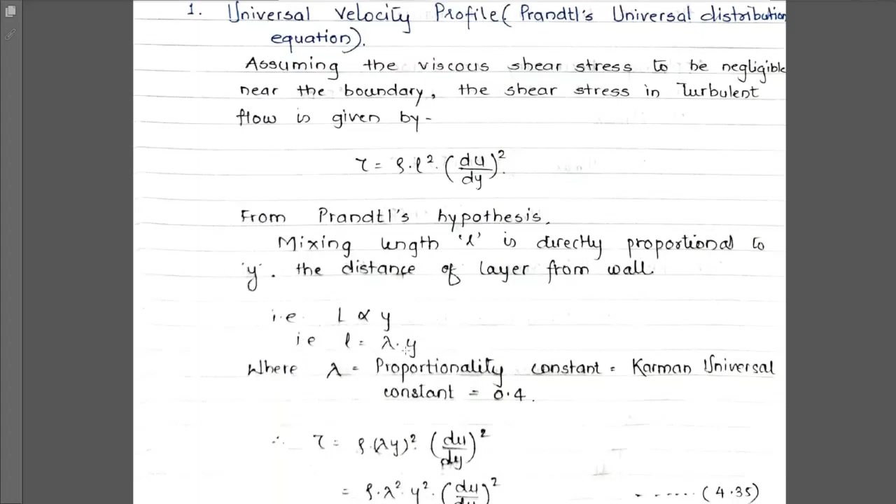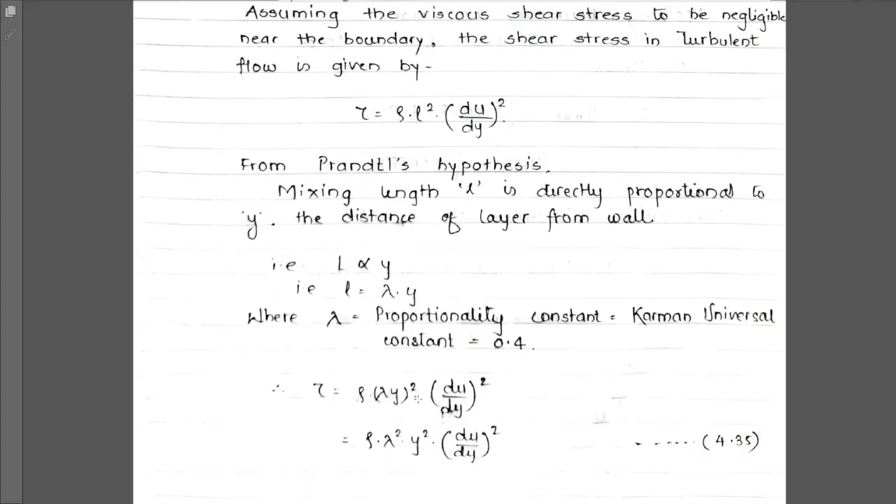If we substitute the value of L, that is lambda into y, into the expression for shear stress, we get tau equals rho into lambda y whole bracket square into du by dy whole bracket square. Rearranging these terms, we can write shear stress equals rho into lambda square y square into du by dy whole bracket square.

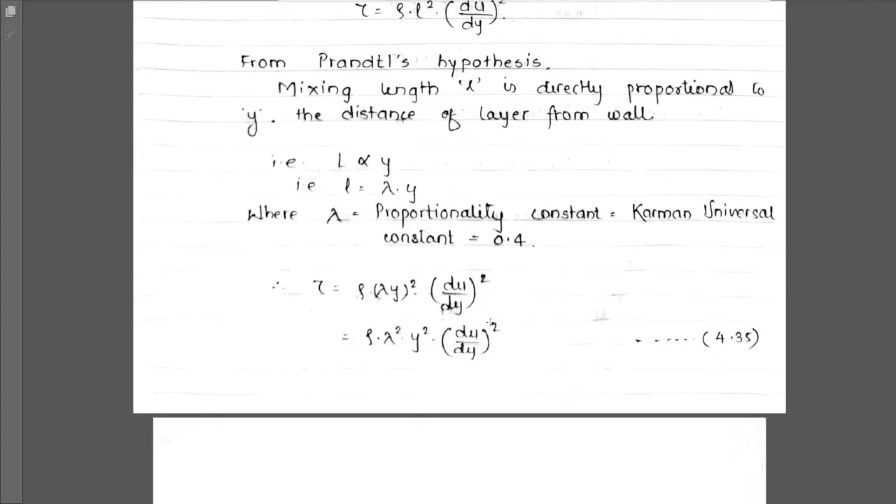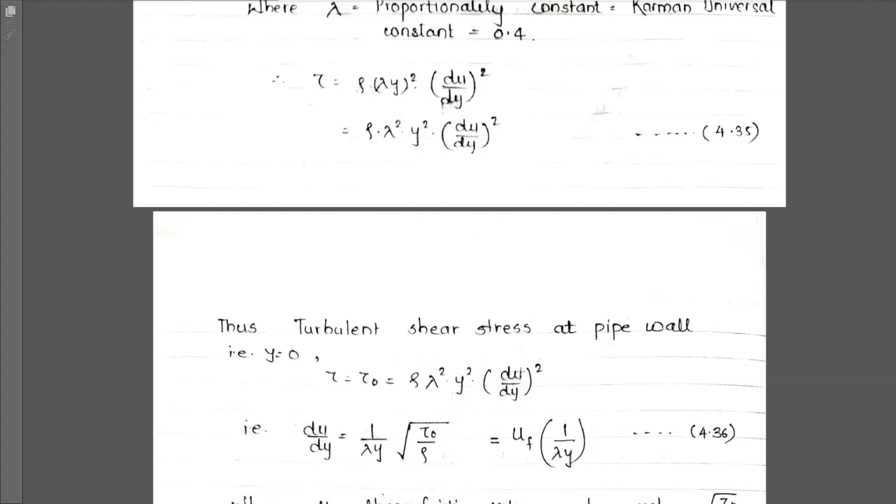If small values of y, very close to the boundary of the pipe, are considered, Prandtl assumed the shear stress tau to be constant, equal to tau zero, the shear stress at the pipe boundary. So tau equals tau zero equals rho into lambda square into y square into du by dy whole bracket square. We can rearrange this to find du by dy.

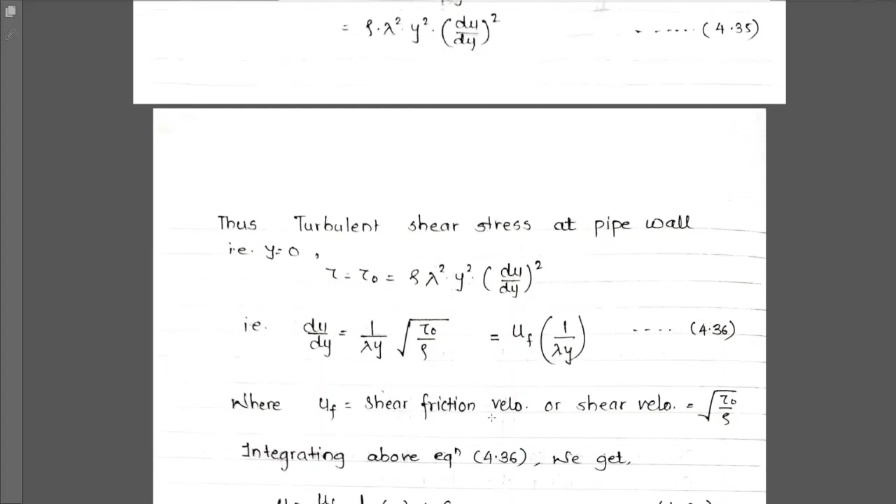We can arrange this expression in terms of du by dy as 1 by lambda y, root of tau zero by rho. We can substitute the value of root of tau zero by rho as u suffix f, where u suffix f is nothing but the shear friction velocity, also called the shear velocity.

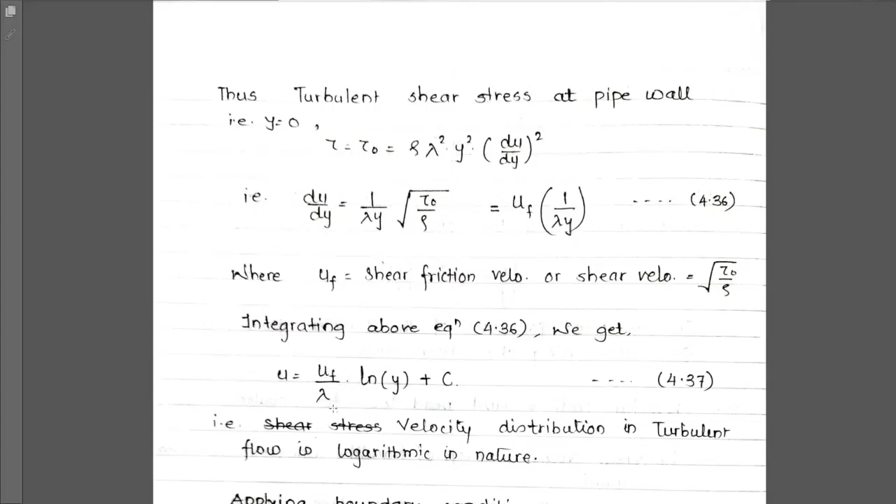Now integrating this equation, we get the velocity expression: u equals u suffix f divided by lambda into ln y, plus c.

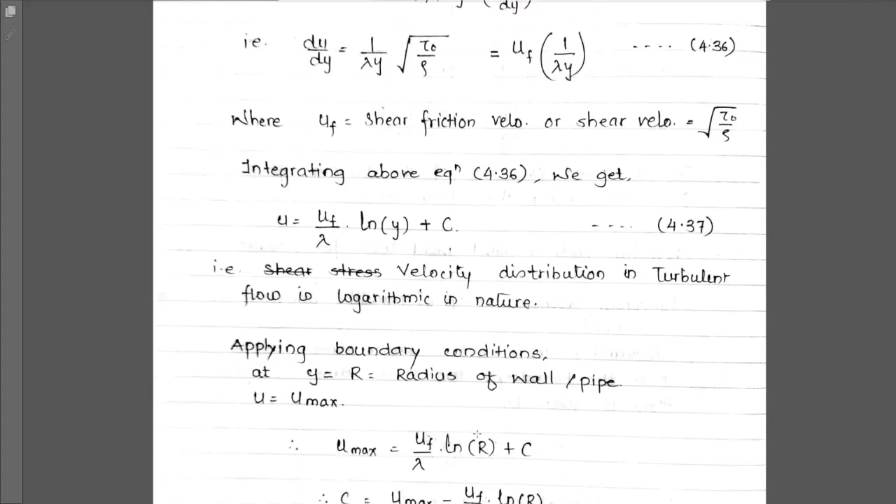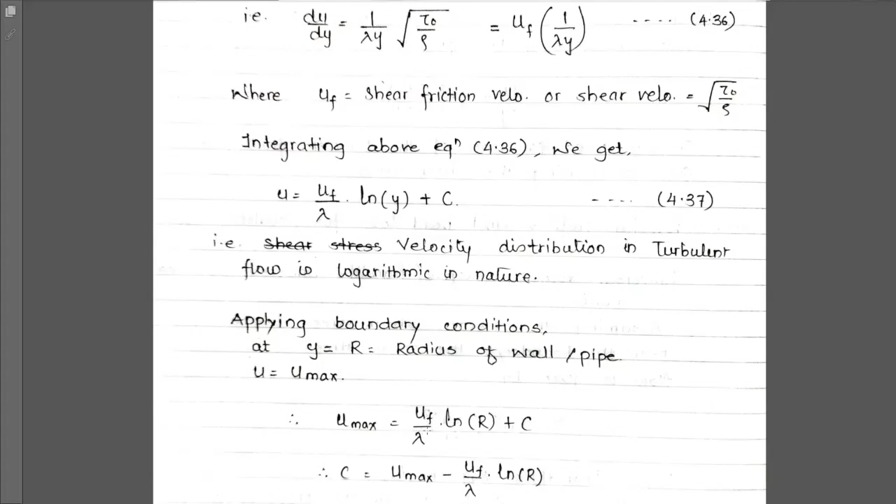To find the value of this constant, we apply the boundary conditions: y equals capital R, the radius. We know that at y equals capital R, u equals u max. So u max equals u suffix f divided by lambda into ln R, plus c.

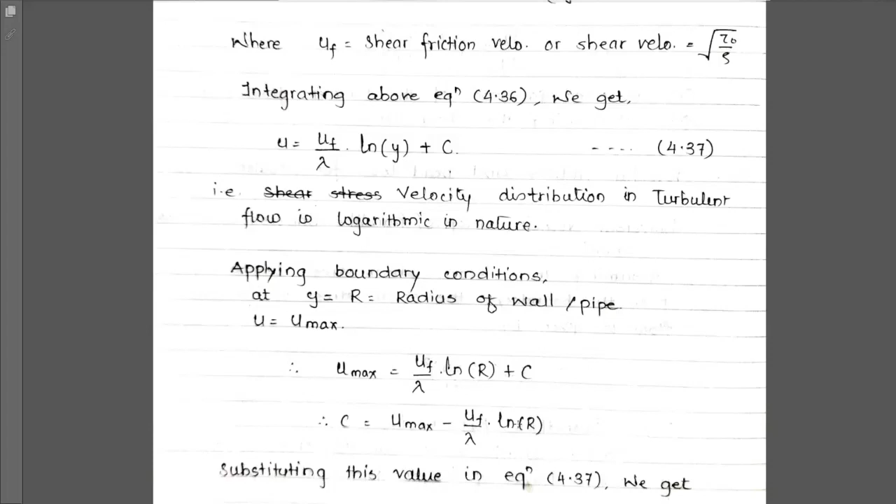So we get the value of c as u max minus u suffix f divided by lambda into ln R. Substituting this value of c, we get the equation as u equals u max plus u suffix f divided by lambda into ln y minus ln R.

Now we know that log of a minus log of b can be written as log of a divided by b. Similarly, we can write ln y minus ln R as ln y by R. So the expression becomes u equals u max plus u suffix f divided by lambda into ln y by R.

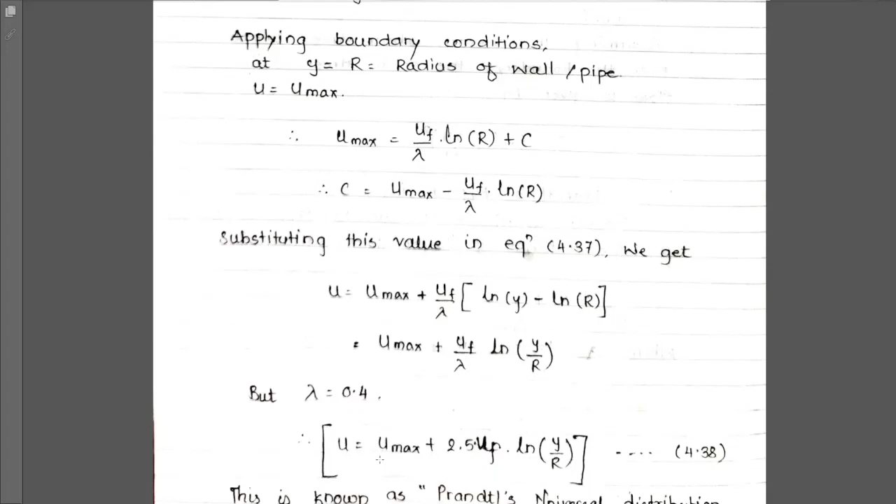But we know the value of lambda is 0.4. Substituting this value, we get the expression u equals u max plus 2.5 uf into ln y by R. This is known as Prandtl's universal distribution equation.

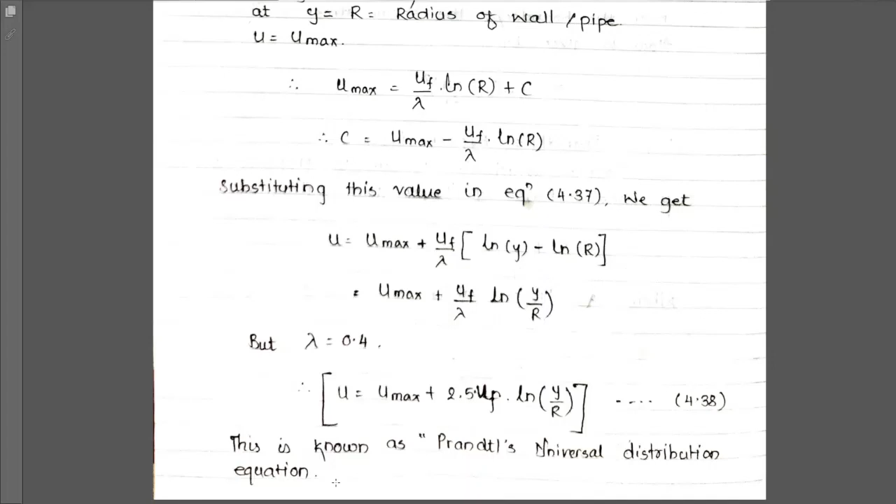So in exams, for this topic, the question can be: explain Prandtl's universal distribution equation and derive the same. So this will be the expression. Now we can say that the velocity distribution in turbulent flow is logarithmic in nature, from this expression.

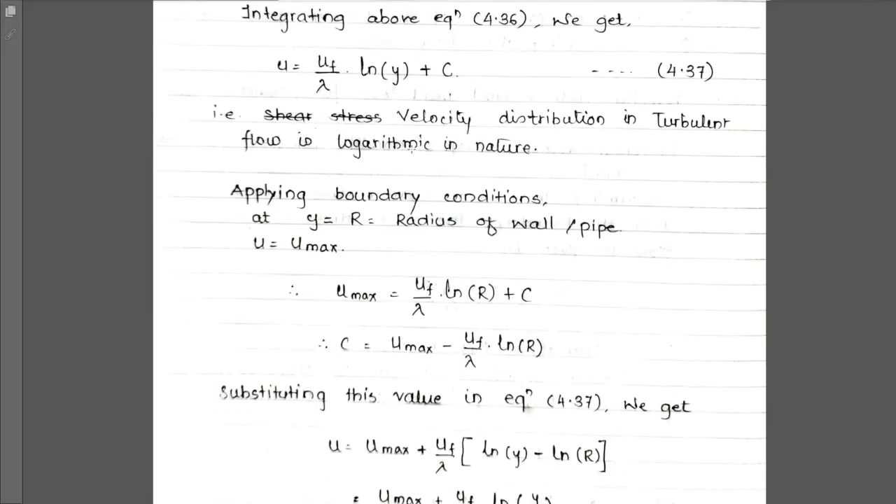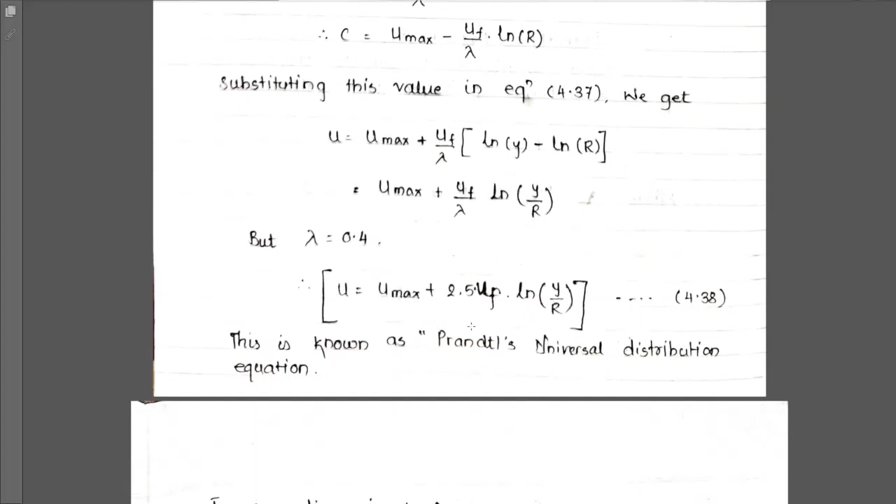Here log is there, so it is logarithmic in nature, and this is the equation given by Prandtl's universal distribution equation. Now in non-dimensional form, u max minus u divided by u suffix f is equal to 2.5 ln r by y. If we have to write in terms of log to the base 10, we can write u max minus u divided by u suffix f is equal to 5.75 log to the base 10 r by y, where u max minus u is called the velocity defect.

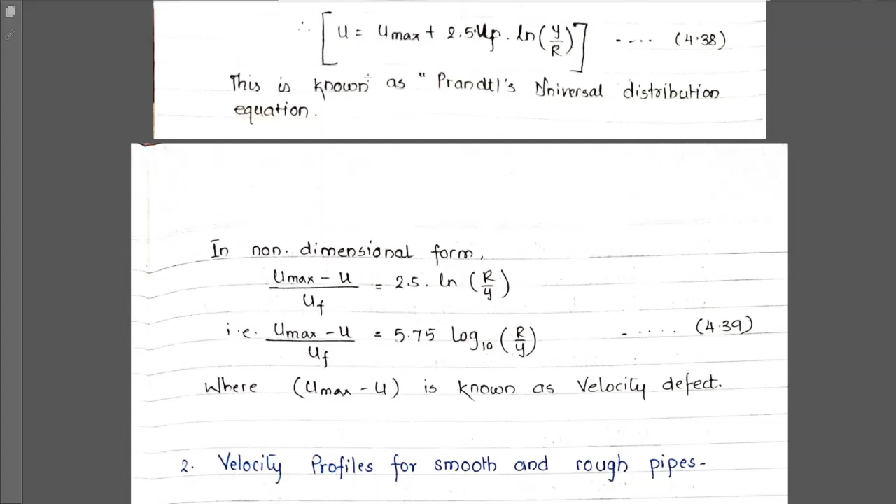So we have seen the velocity distribution in turbulent flow. We have seen the Prandtl's universal distribution equation, which is given as u is equal to u max plus 2.5 uf into ln y by r. Also we have seen that the velocity distribution in turbulent flow is logarithmic in nature, and we have seen what is the velocity defect, that is u max minus u is the velocity defect.

Now we will see how we distinguish smooth and rough boundaries. If this average height k, that is of irregularities projecting from the surface of the boundary, is much lesser than the thickness of the sublayer, that is delta dash, then this type of boundary is called smooth boundary. We can see here k is less than delta dash, or delta dash is greater than k. When this condition occurs, the boundary is said to be smooth boundary.

This is because outside the laminar sublayer the flow is turbulent, and the eddies of various sizes present in the turbulent flow try to penetrate the laminar sublayer and reach the surface of the boundary. We know that above the laminar sublayer there is turbulent flow, and these eddies present in the turbulent flow try to penetrate this laminar sublayer to reach the surface of the boundary. But due to the greater thickness of this laminar sublayer, the eddies are unable to reach the surface irregularities, and hence the boundary behaves as a smooth boundary. As this thickness of the laminar sublayer is more, the eddies are unable to get into this laminar sublayer to reach the surface of the boundary, so the boundary behaves as smooth boundary. This type of boundary is called hydrodynamically smooth boundary.

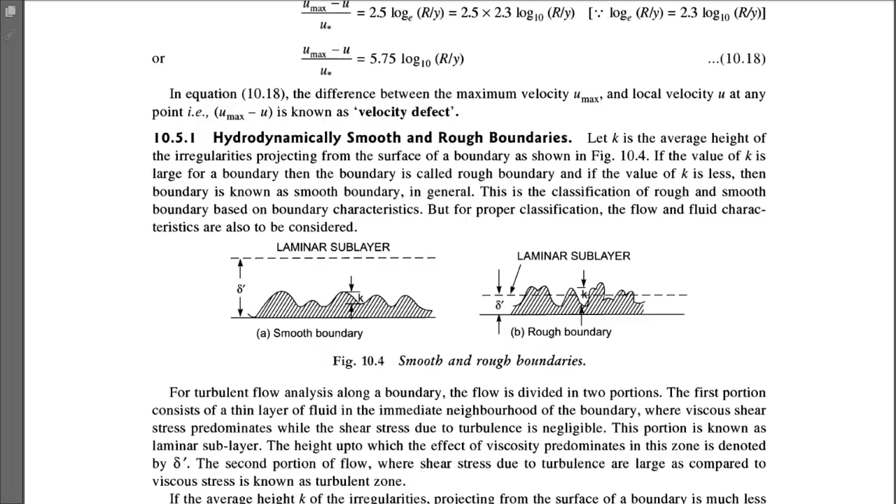Clear about hydrodynamically smooth and rough boundaries? Now we will see the various conditions by which we can distinguish the hydrodynamically smooth and rough boundaries.

Nikuradse's experiment was used to distinguish this. First, for hydrodynamically smooth boundaries, K by delta dash should be less than 0.25, and for rough boundaries, K by delta dash is greater than 6. Now, when the boundary is in transition, this condition is used: 0.25 is less than K by delta dash, and K by delta dash is less than 6.

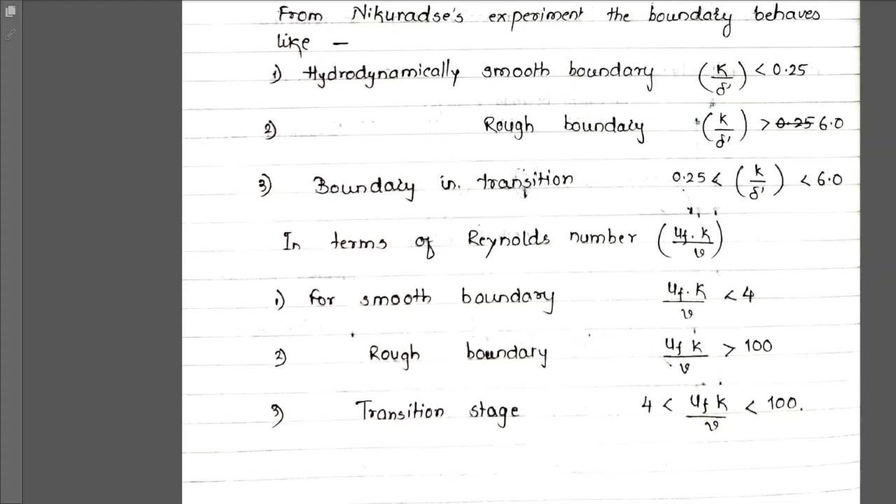Now we can distinguish smooth boundaries and rough boundaries in terms of Reynolds number in this manner. For smooth boundaries, U suffix f into k divided by v should be less than 4; in that condition, the boundary is called smooth boundary. For rough boundary, U suffix f into k by v should be greater than 100. And for transition stage, U suffix f into k by v should be greater than 4 and less than 100.

The velocity distribution for smooth and rough pipes, we will see next.

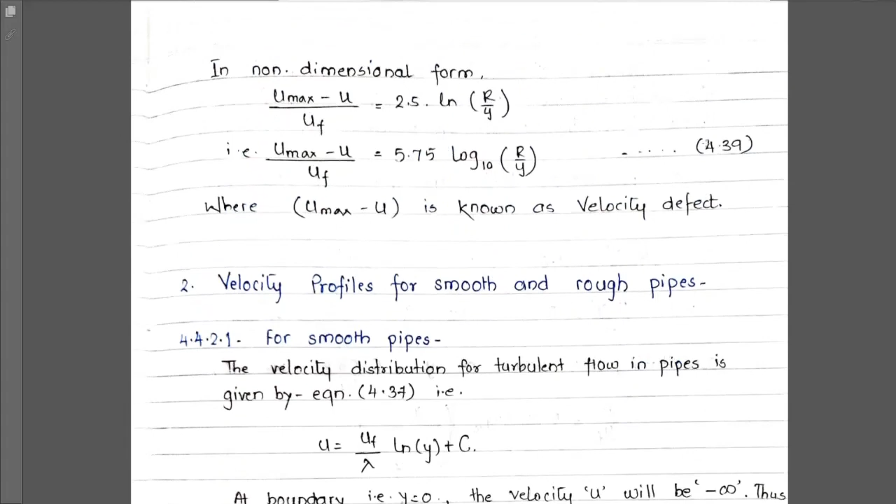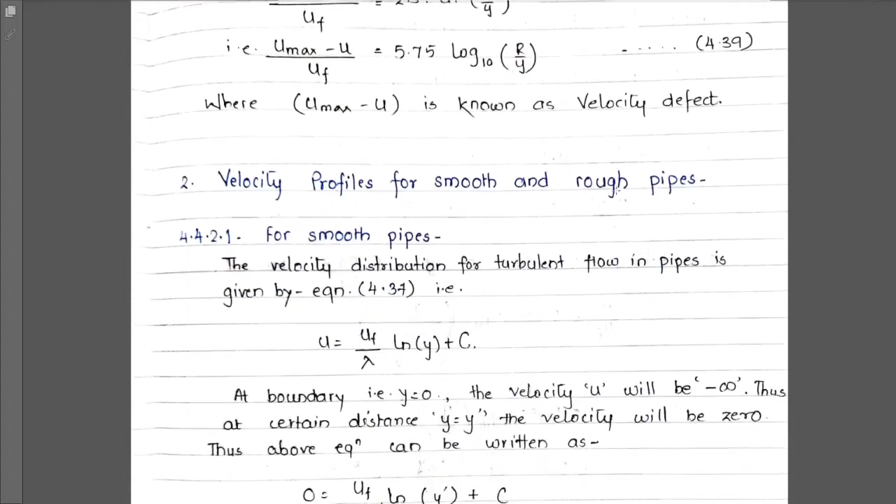First we will see the velocity distribution for smooth pipes. The velocity distribution for turbulent flow in pipes is given by equation 4.37: U is equal to UF by lambda into ln y plus c. This is the expression for the velocity distribution in turbulent flow.

Now we will apply the boundary conditions. At the boundary, y is 0, and the velocity u will be minus infinity. If you substitute the value of y as 0, we know we will get the velocity as minus infinity. This implies that at a certain distance y equal to y dash, the velocity will be 0.

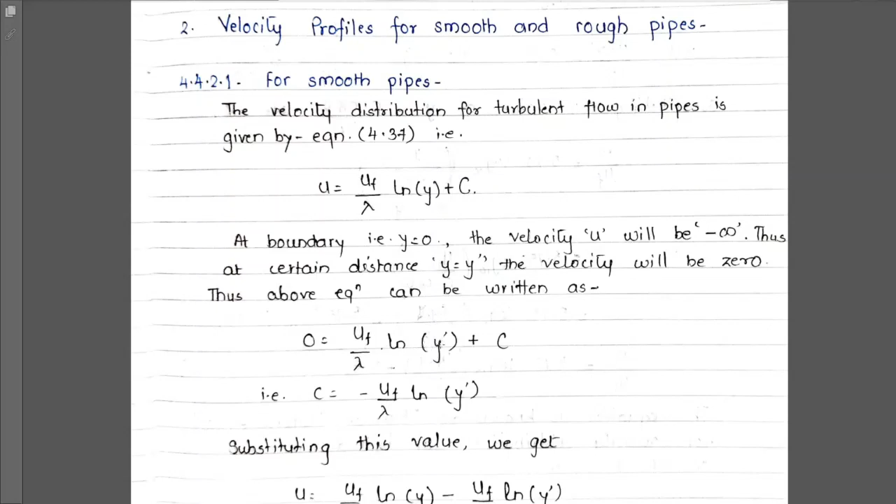Thus the above equation can be written as, if velocity is 0, uf by lambda into ln y dash plus c. So we can write the value of c as minus uf by lambda ln y dash. Substituting this value, we get u is equal to uf by lambda ln y minus uf by lambda into ln y dash. By applying the boundary conditions, we calculated the value of constant c, then substituted it in this equation, and found that u is equal to uf by lambda ln y by y dash.

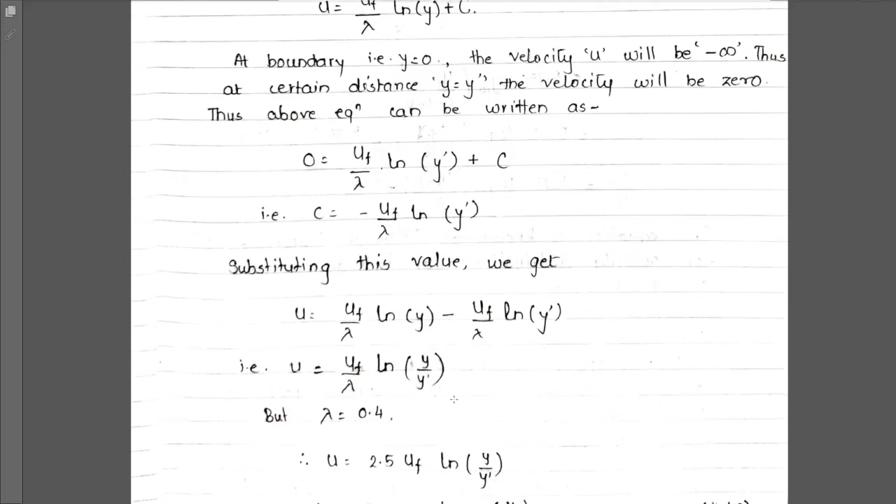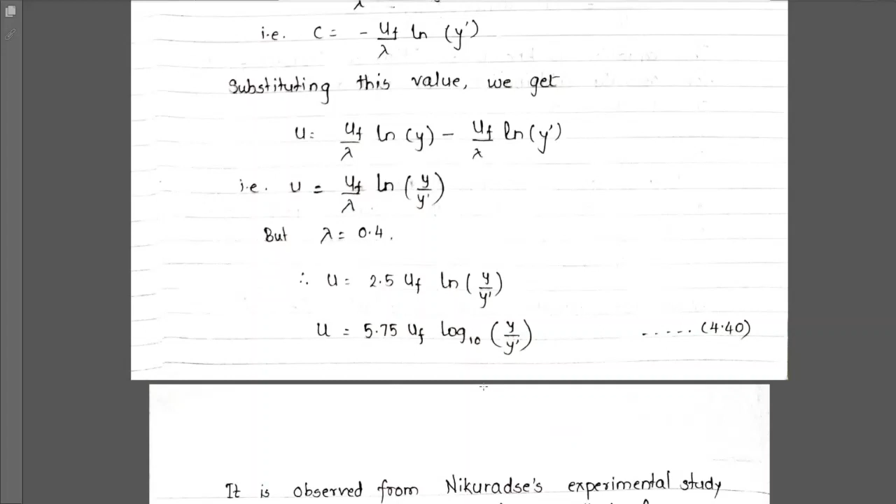In this equation we know the value of lambda, that is 0.4. Substituting this value of lambda as 0.4, we get u is equal to 2.5 uf into ln y by y dash. If we represent it in terms of log to the base 10, we get the equation u is equal to 5.75 uf log to the base 10 of y divided by y dash.

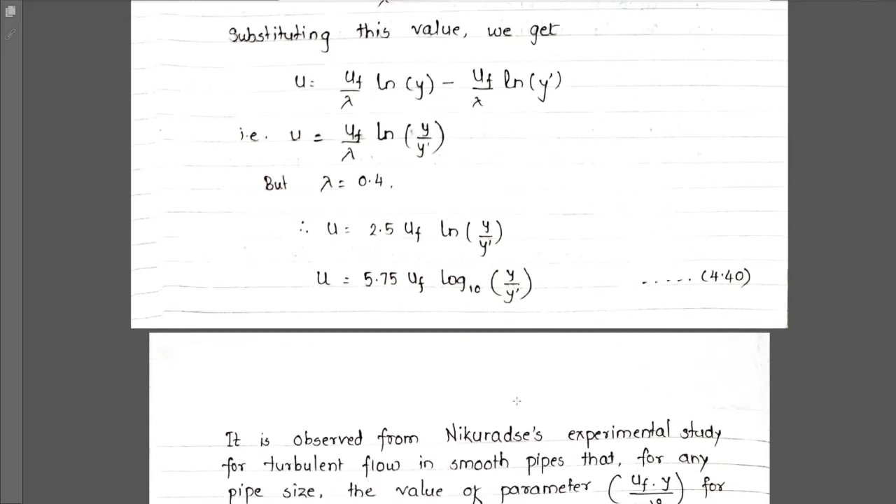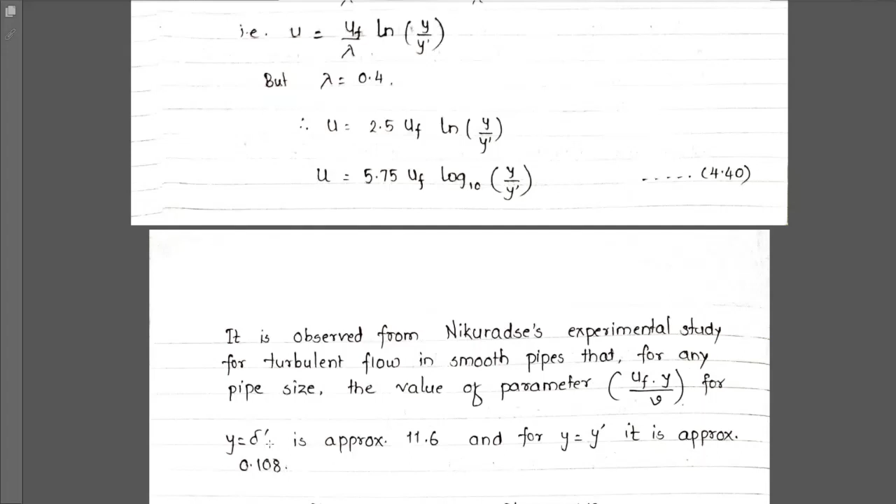It is observed from Nikuradse's experimental study for turbulent flow in smooth pipes that for any pipe size the value of the parameter uf into y divided by v, for which y is equal to delta dash, is approximately equal to 11.6, and for which y is equal to y dash, is approximately equal to 0.108. That is, uf into delta dash by v is equal to 11.6.

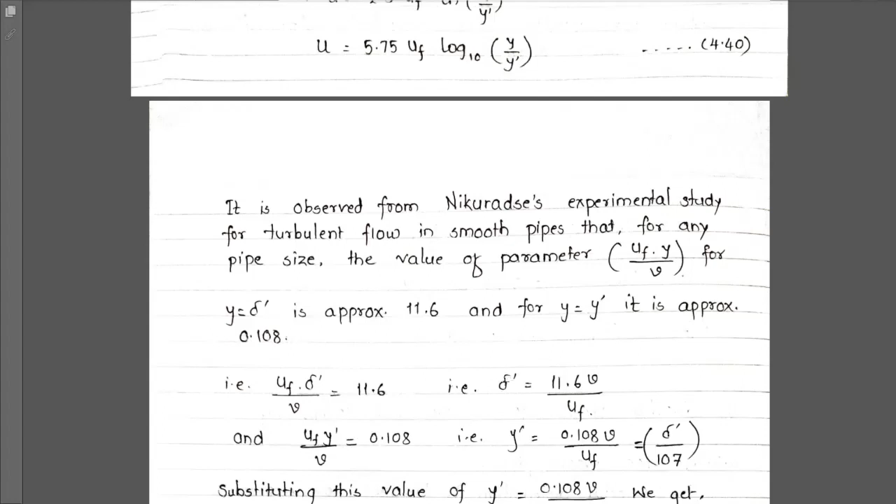We can find the value of delta, expressing it in terms of delta dash as 11.6 v by uf. Similarly, we know uf y dash by v is equal to 0.108, so we can write y dash as equal to 0.108 v by uf.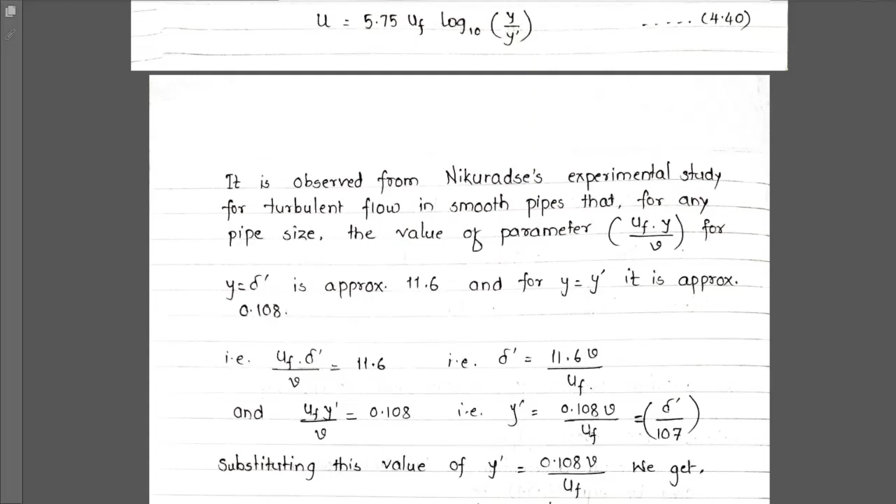Substituting this value of y dash as 0.108 v by uf, we get u by uf is equal to 5.75 log to the base 10 of y divided by 0.108 v by uf. Substituting this y dash value, we get this equation. Then by solving this equation, we get 5.75 log to the base 10 of uf into y divided by 0.108 v.

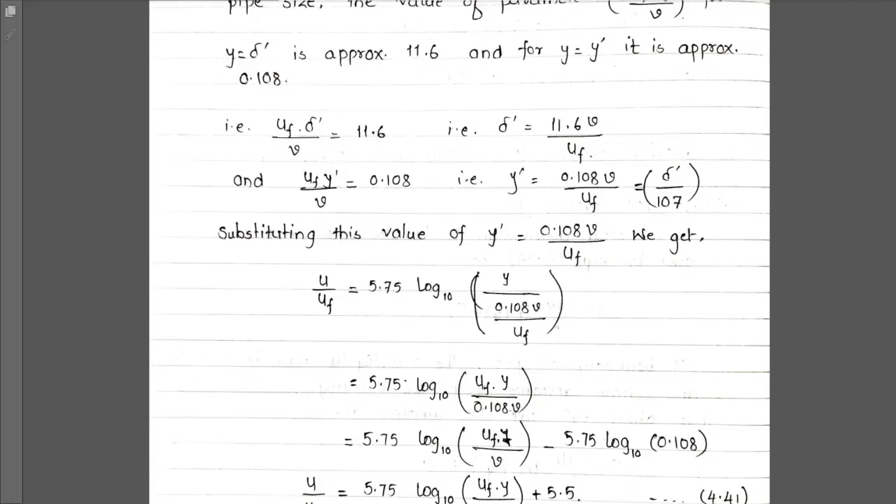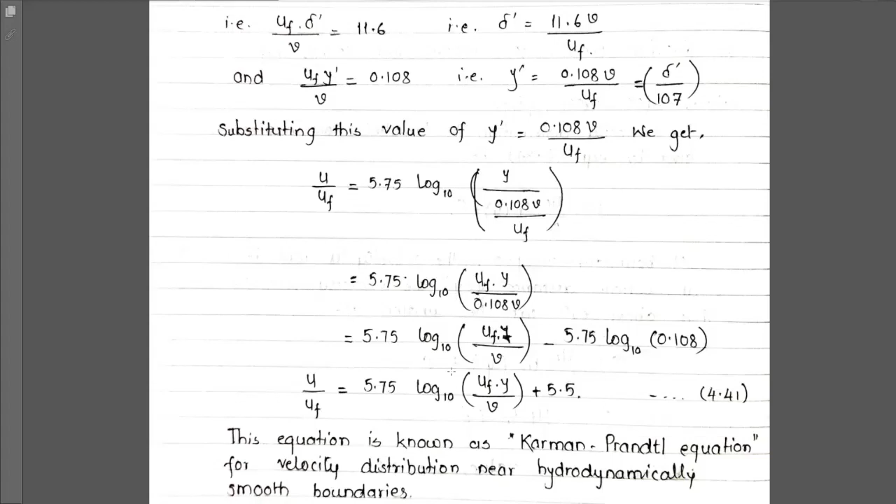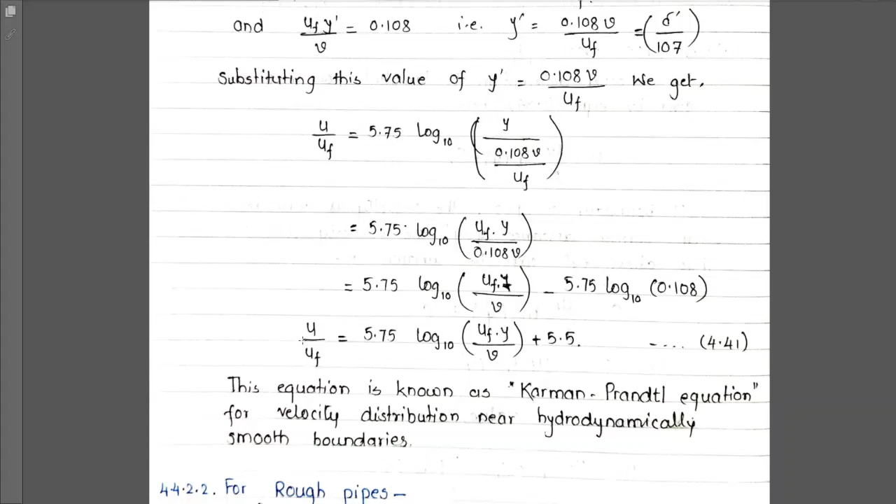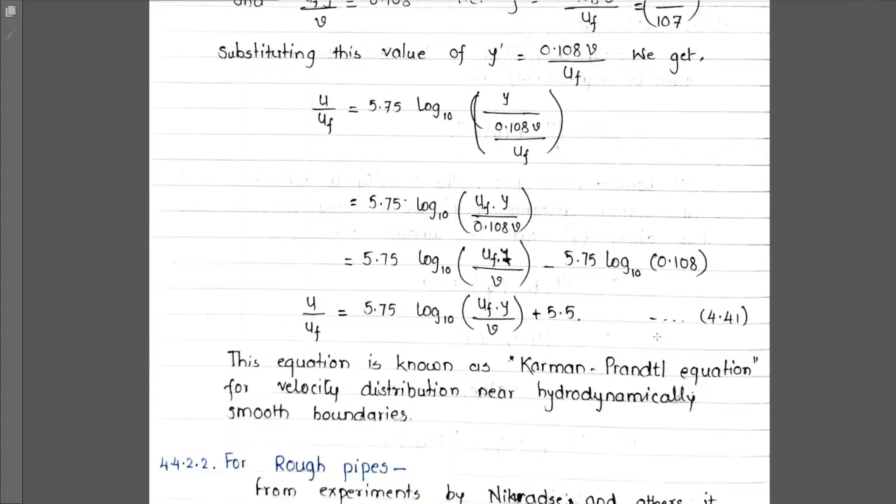Rearranging, we write it as 5.75 log to the base 10 of uf into y divided by v, minus 5.75 log to the base 10 of 0.108. So we can write it as 5.75 log to the base 10 of uf into y divided by v, plus 5.5. This equation is known as the Karman-Prandtl equation for the velocity distribution near hydrodynamically smooth boundaries.

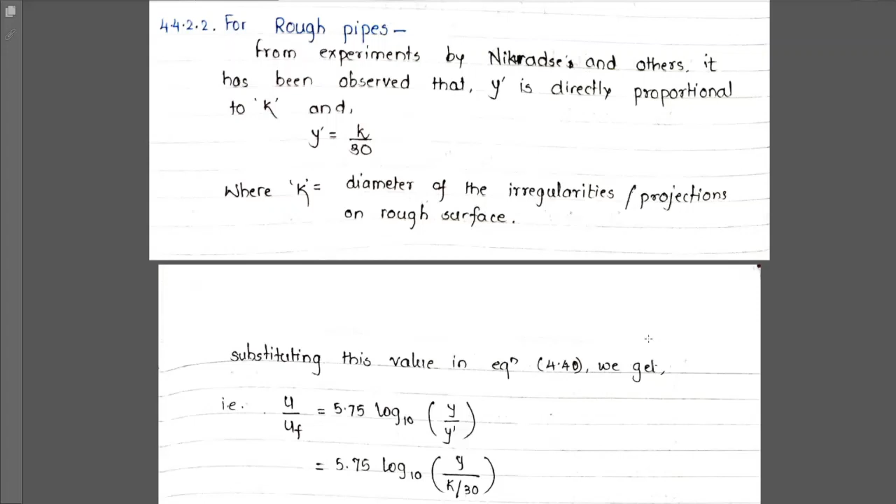Now we will see for rough boundaries, the pipes having rough boundaries. From the experiments by Nikuradse and others, it has been observed that y dash is directly proportional to k. So we can get the expression of y dash as y dash is equal to k by 30, where k is nothing but the diameter of the irregularities or projections on the rough surface. Now substituting these values in equation 4.40.

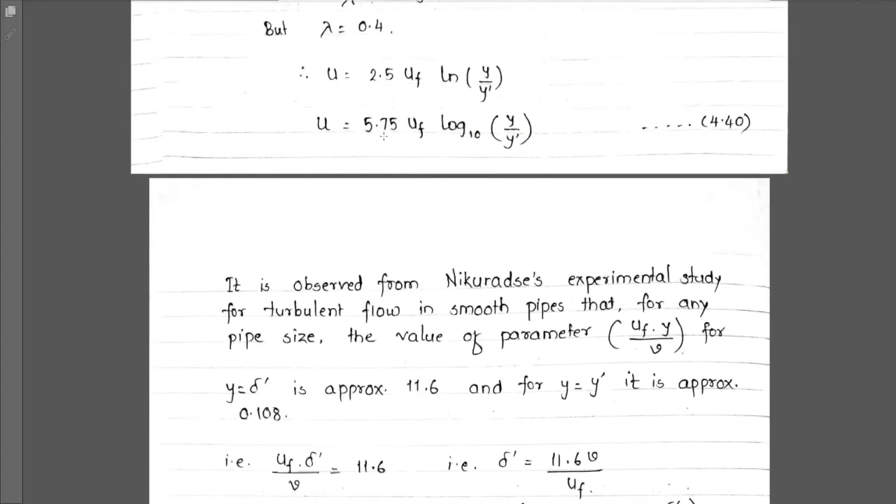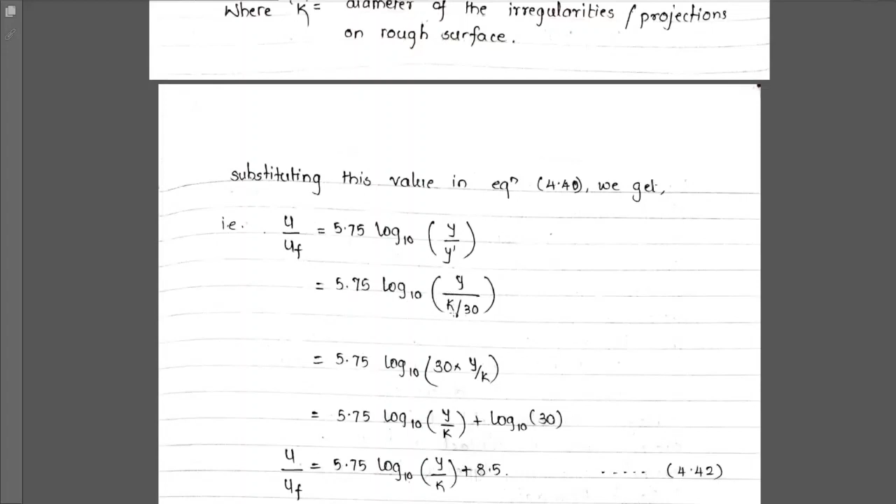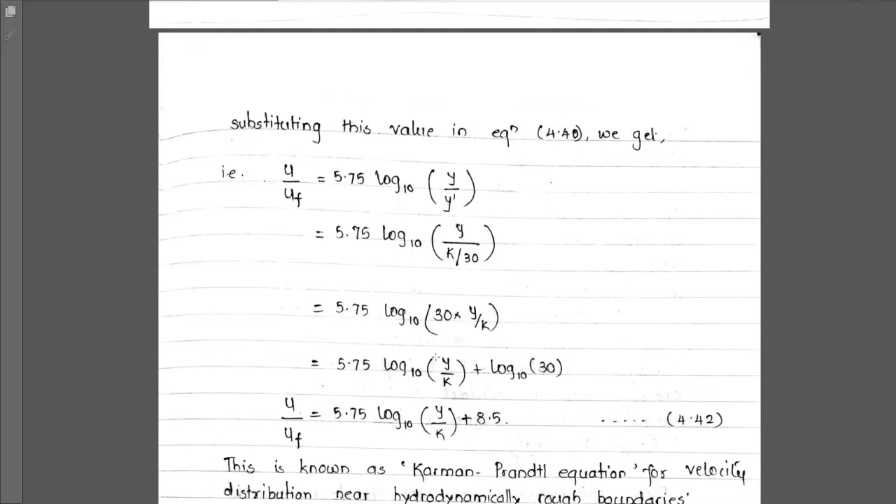That is, u is equal to 5.75 uf log to the base 10 of y by y dash. Substituting the value of y dash, we get 5.75 log to the base 10 of y by k divided by 30, so 5.75 log to the base 10 of 30 into y divided by k. Rearranging these terms, we get 5.75 log to the base 10 of y by k plus log to the base 10 of 30. So we can write u by uf is equal to 5.75 log to the base 10 of y by k plus 8.5. This is known as the Karman-Prandtl equation for the velocity distribution near hydrodynamically rough boundaries.